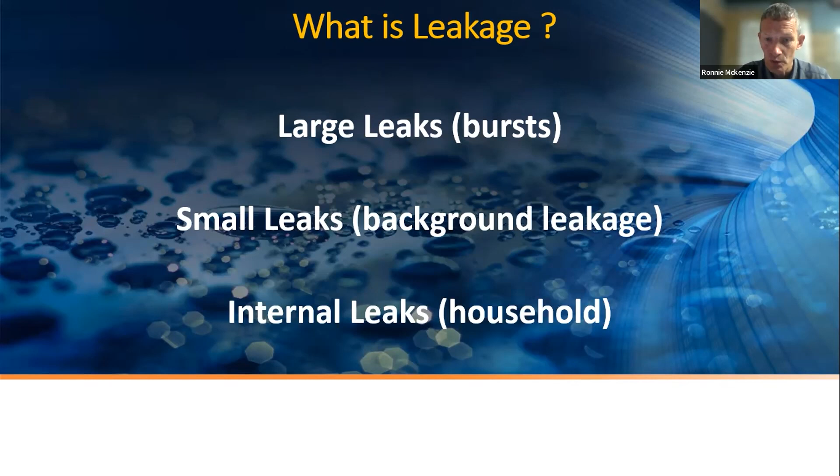Okay, so we've covered BABE. That was the UK water industry. They developed a whole bunch of different approaches to managing leakage. There's a little background leak there, just to show you a background leak. It's tiny. It's not worth looking for. You won't find it with leak detection equipment, but they are there in your system all the time. You cannot get rid of them.

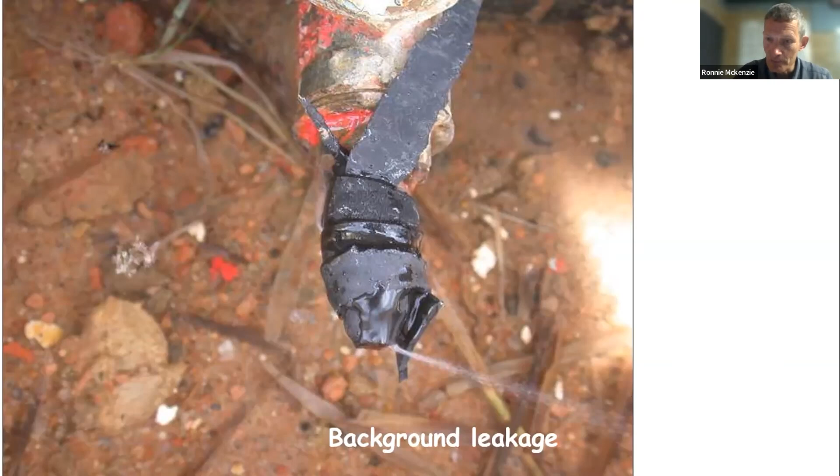The only way to reduce background leakage is either reduce the pressure or rip out your network and replace your network. And even then, you will always have some level of background leakage. You can't get rid of it at all. Burst leakage is normally quite obvious. Not always, but generally quite obvious.

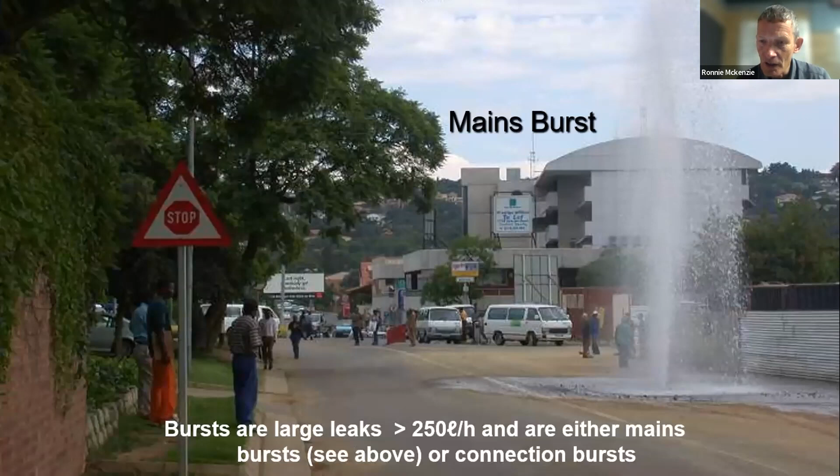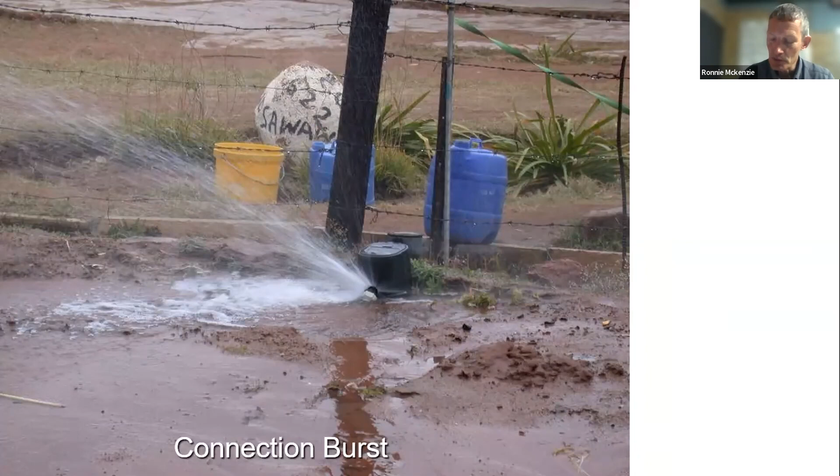This is a burst water main running at about 20 cubes an hour at about 50 meters of pressure. This is a connection burst. Again, most burst leaks are actually on the connection. That is the weakest part of the network. And most of the leaks do occur on the connection between the main and the water meter.

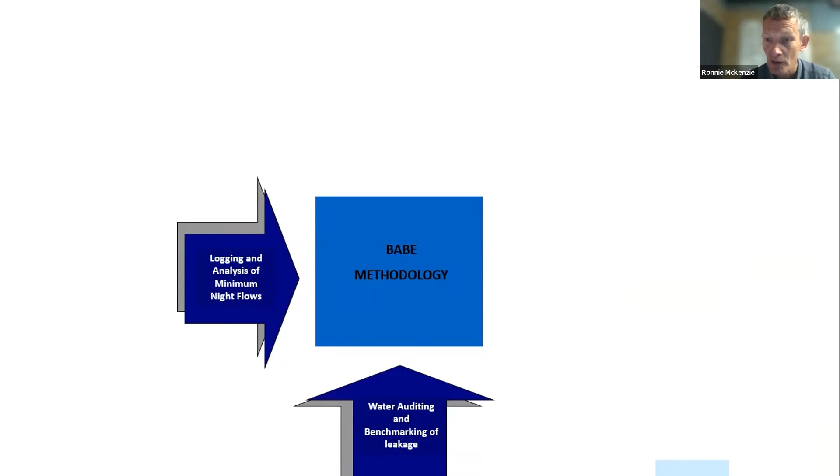Now, the UK water industry decided that if you're looking at physical leakage, then the BABE methodology is geared to help you manage physical leakage. And one of the things we look at is logging and the analysis of minimum night flows, which I'll come on to in a minute. Another item is the water auditing. We have a standard water balance, the IWA water balance, which is available off the internet, or many of us will be happy to help you with that if you need details on that.

Economics of active leakage control. That is how often you should send teams in to look for leaks in areas where you think you have a leakage problem, but you don't know where the leaks are because they're not visible. So you send a team in with leak detection equipment, looking for leaks, and the idea being that if they find them, you should fix them. We'll come on to this a little bit later, but the main message here is don't send people in to look for leaks if you're not already fixing the ones you know about. That is generally a rule of thumb.

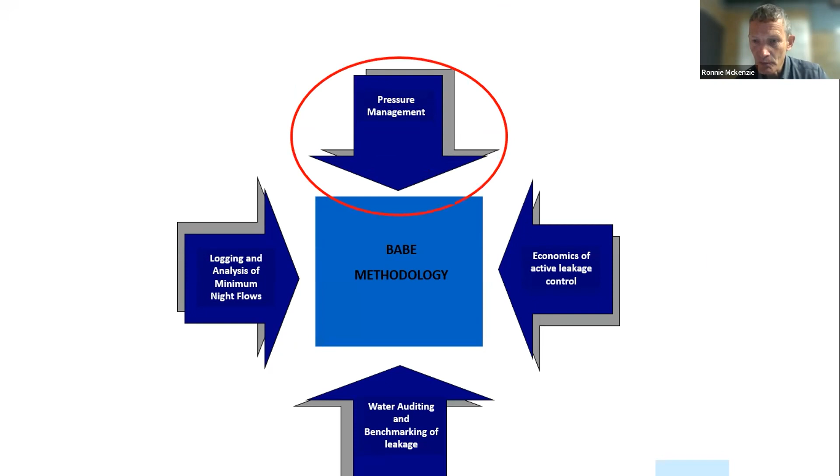Pressure management is one of the key elements of the BABE methodology, and we're going to talk about that this morning together with the logging. So we'll talk about pressure management to start with. Basically, pressure management in many cases is the low-hanging fruit. It is often an intervention that you can implement quickly and effectively, and it will make significant savings, big savings. It will often give you paybacks of less than a year and occasionally down to 3 or 4 weeks if you implement it properly in areas of high leakage.

The other message with pressure management is if the underlying problem in your system is high water pressure, then if you just fix the leaks and you don't deal with the high water pressure, then you're wasting your time and money, because the leaks that you fix will just pop somewhere else and the system will hit a balance at a certain pressure. So if you're going to implement leak detection, it's often a good idea to bring pressure management in at the same time. And as you fix the leaks, you gradually lower the system pressure at the same time.

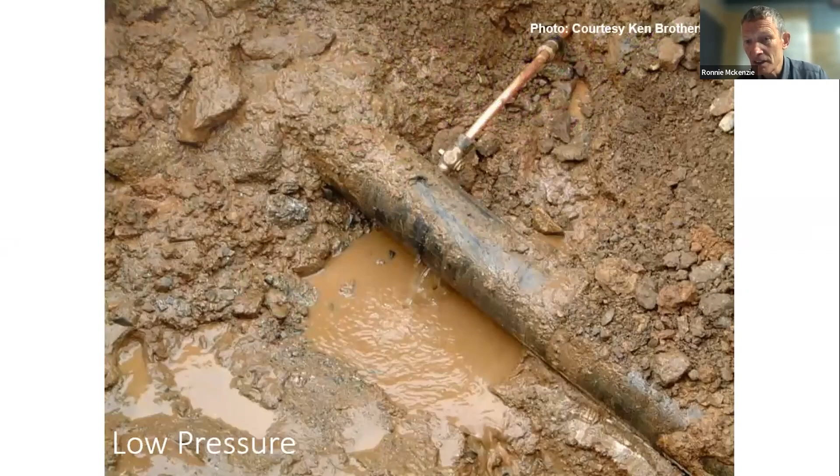Okay, this is just a picture of a leak at low pressure, and this is a picture of the same leak at high pressure. So pressure drives leakage. Most systems are designed to give a set minimum pressure at a critical point during periods of peak demand. So typically at peak demand, your pressure at the critical point somewhere in the system might be 20 meters. That is normally dictated by the fire department.

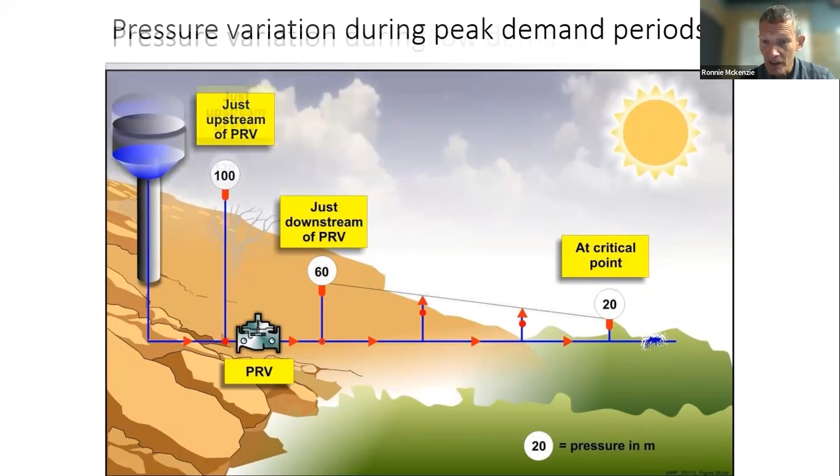They generally want a minimum pressure of around 20 meters in order to supply enough water in the event of a fire. Now at night time, that pressure builds up. So at night time, you've got high pressure in your system. And the idea behind a lot of pressure management is that during the daytime, the pressure's normally quite a bit lower than at night time.

And at night time, as the system starts replenishing and the reservoirs start filling up, the static pressure in your system increases. And that is why most of your burst pipes will occur during the nighttime period. As I say, at nighttime, the static pressure builds up. It also means that at nighttime, your leaks are running much faster than they run during the daytime. So if you can do something to reduce the pressure at nighttime, then you may make big savings.

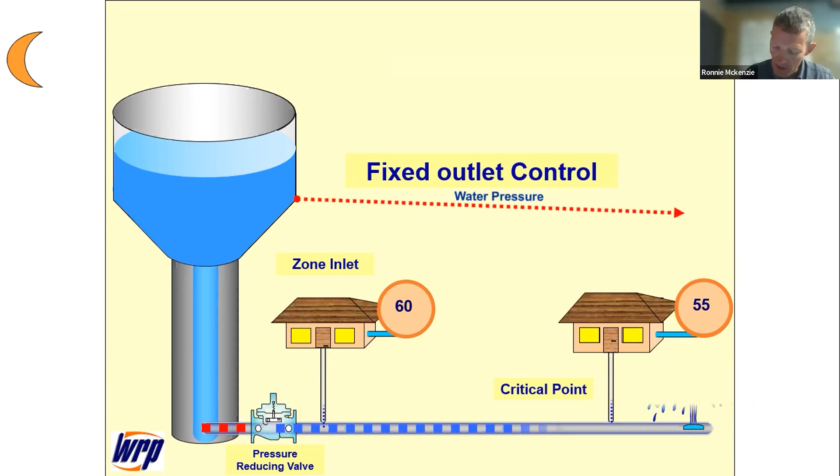It's not always the case. Sometimes you don't have pressure. Sometimes you're on intermittent supply, in which case it's a different problem. Here in South Africa, we've probably pioneered some of the largest advanced pressure control installations in the world. The biggest one that was built at the time was back in 2000 in a place called Khayelitsha.

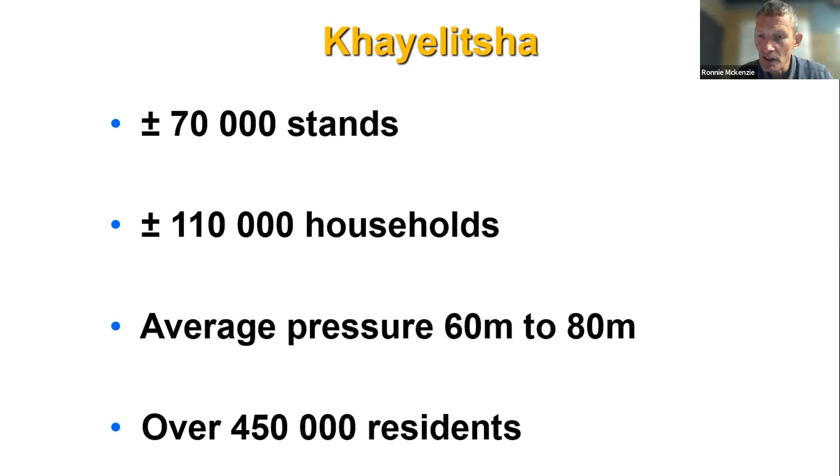Khayelitsha is a low to medium level housing area. It's got some very dense houses. It's got many houses that have waterborne sewage, etc. So it's got a variation of housing types. 70,000 stands, 110,000 households. Average operating pressure was 60 to 80 meters, and we supplied over 450,000 people from a single installation.

We put in advanced pressure control. Advanced pressure control is simply normal pressure control where we add an electronic controller, or a hydraulic controller for that matter, which will reduce the pressure at nighttime or during off-peak periods when you don't have a high demand. So you're lowering the pressure when the demand is low, and in that way you reduce the leakage.

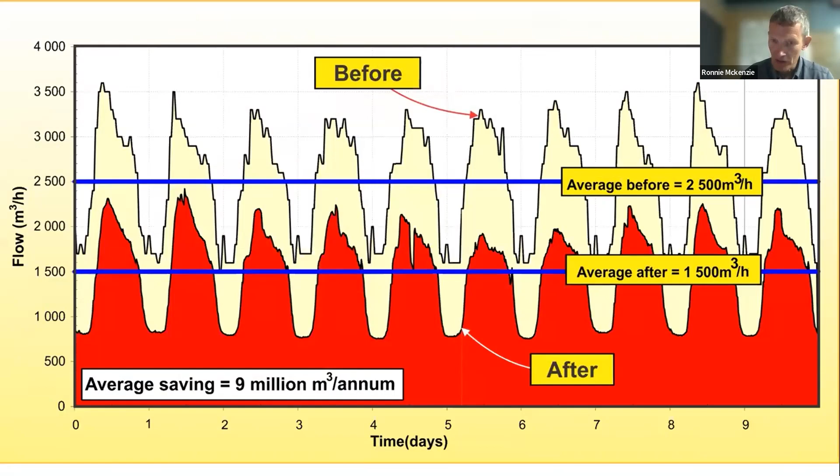And in this particular installation, we were saving 9 million cubic meters of water per annum, which is a fair chunk of water. Hourly savings were 1,000 cubic meters an hour. That's a megaliter an hour we saved on that installation. The payback was about 3 weeks.

The third big pressure management installation that we built in South Africa was built as a public-private partnership where the private party paid for the installation 100%. We built it, we ran it, we operated it for 5 years, and we received 15% of the savings each year for 5 years. So we received roughly about 75% of 1 year's savings.

In a public-private partnership like that, if it's a performance-based contract, you're typically looking at trying to get somewhere in the order of 1 year's savings. So if you do it over 2 years, you would want 50% per annum for 2 years. Or if you do it over 4 years, you'd want 25% per annum of 1 year's savings. It all depends on the level of leakage to start with.

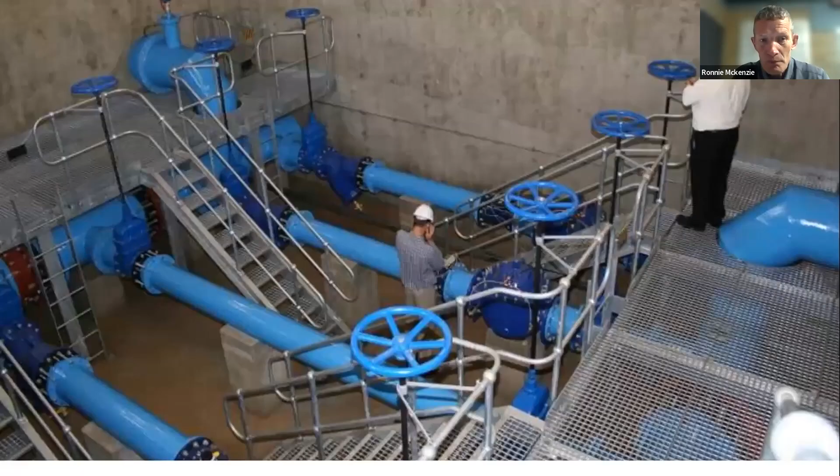This is the installation. It's a big one. It's still running. This was built in 2005. It's still operating. It also supplied 500,000 residents, high pressures. Interestingly enough, 80% of the water went back through the sewer network. So we were flooding the sewage treatment works, and still are, in fact.

I mean, the leakage is still very, very high, and the leakage was running into the sewers, and at night time the sewers were running with clean water, which is the worst thing that you can put into sewage treatment works, because the whole process of a sewage treatment works relies on getting a certain amount of goodies for the little bugs to eat and process and churn everything up.

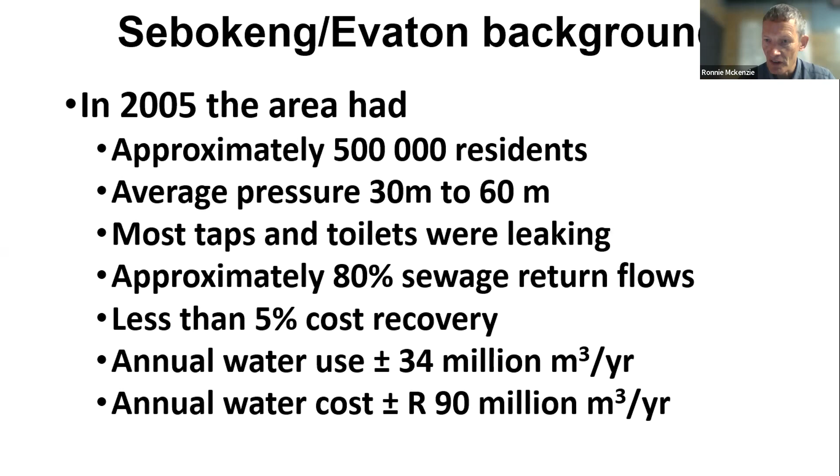If you flood them with clean water, then they just get washed out the system. And in the morning, when all the goodies arrive, there's nothing left to eat, to gobble them up. So it's a very important thing that you don't wash through a sewage treatment works with clean water. The savings, again, in that installation, we had a minimum night flow of 2,800, which was astronomical.

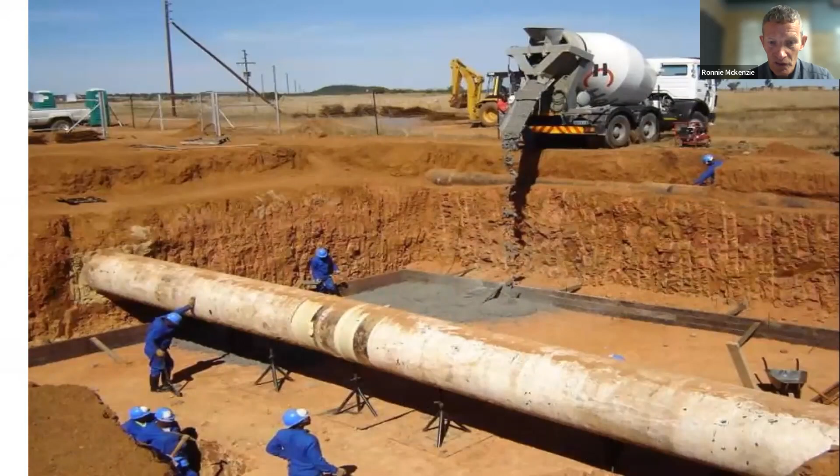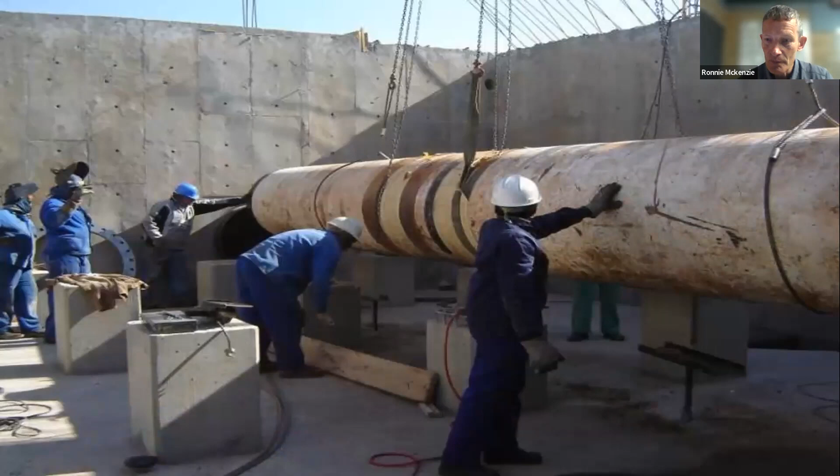We built this big installation. I'm going through it quite quickly just to let you see a few of the pictures. Everything was done by hand in order to create employment. That was part of the deal. So that big hole that you see there was dug by hand. This is us cutting into the pipe. This was us welding on the main flanges to the pipe.

You have to weld on the flange. You can't just weld straight onto a pipeline. It doesn't work because most pipes, if they've been in the ground for any length of time, are slightly oval. And if you try and weld a round pipe onto an oval pipe, you're in trouble. It just doesn't work. So you weld big flange plates on, and that's what we did there.

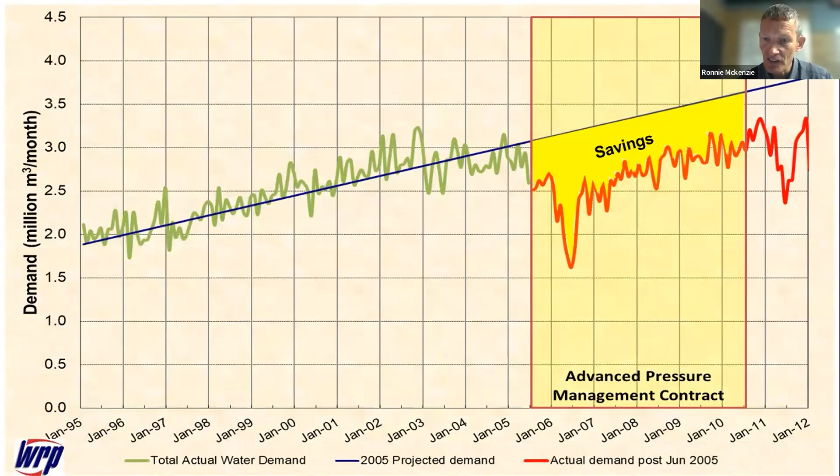This is us bringing the installation in. We brought it in, and the results, we managed to save about 50 million cubes of water. Again, very similar to the previous one. There's the savings, a picture of the savings. And when you put it into money terms, it was quite significant. It saved about $20 million over a 5-year period at the time.

Bear in mind, the water cost when this was built was 2 South African rand per cubic meter. The water is now 12 South African rand per cubic meter, which is almost $1 per cubic meter. So if we were to build this installation today, the cost of the water has gone up 6-fold, and the cost of building the installation has probably doubled. So we would be 3 times more effective if we were to do this installation today. So the payback would be best part of a week, maybe. So this is quite an interesting one.

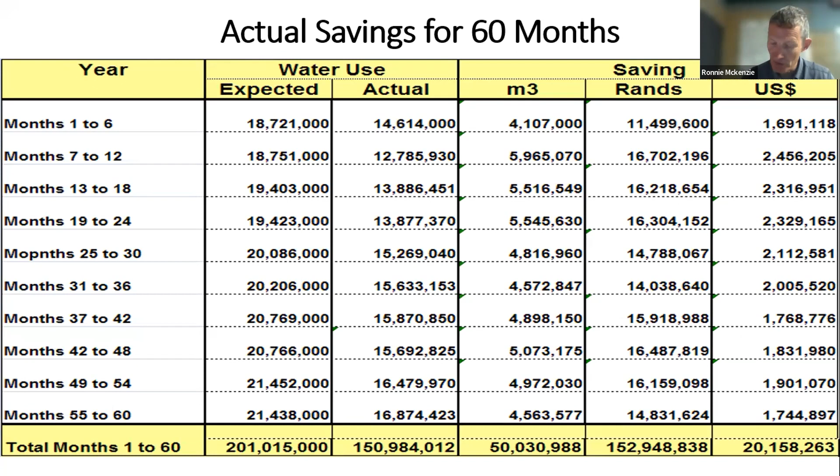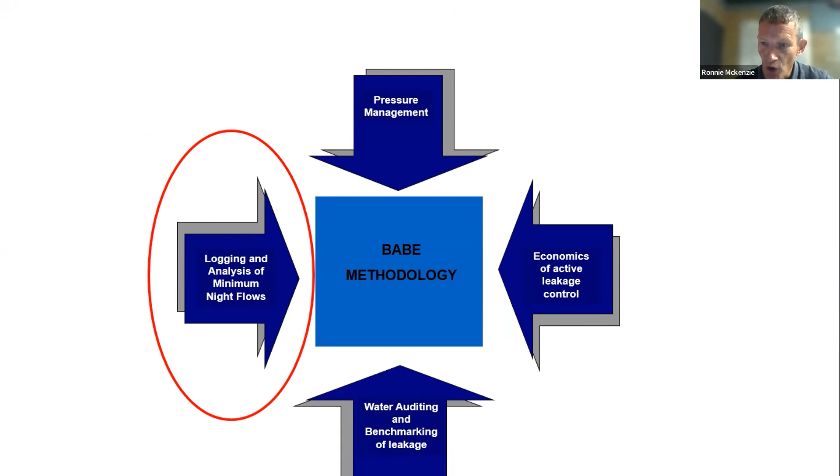Okay, back to the BABE methodology. I showed you this slide a minute ago. We're still on this one. I'm now going to look a little bit at logging. We're looking at the logging and minimum night flow analysis. Now, there's 4 BABE models.

And in the IWA, we have very many lady members. And when we organised our conference in Cape Town, I think our committee was 6 lady members and we only had 2 men. And it went really, really well, I have to say, because the men kept out of it and just let the ladies do everything. It sounds a bit chauvinistic, that, but they wouldn't let me do anything. I was actually told to butt out and just let them get on with it. So anyway, we had a good conference in Cape Town.

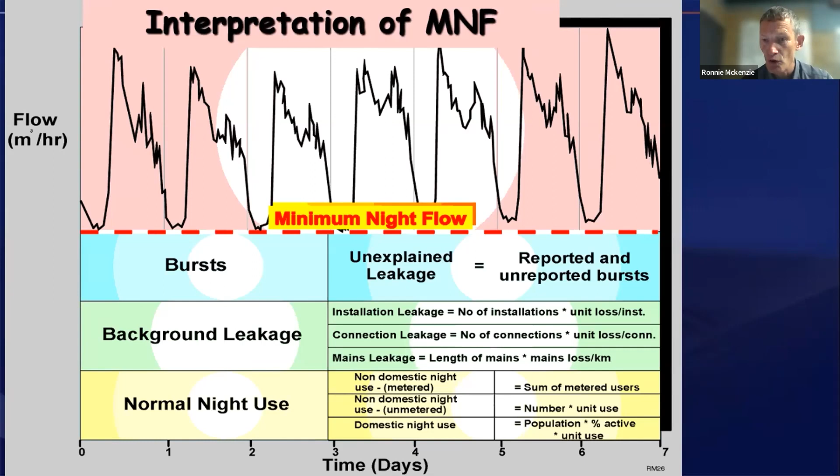Then you add the background leakage and the normal night use together, subtract it from your minimum night flow, and the difference is then your unexplained burst leakage, and that's what you're looking for. I'm not going to go into it in detail. The model's available. We can have a whole presentation just on this. So I'll go through it fairly quickly.

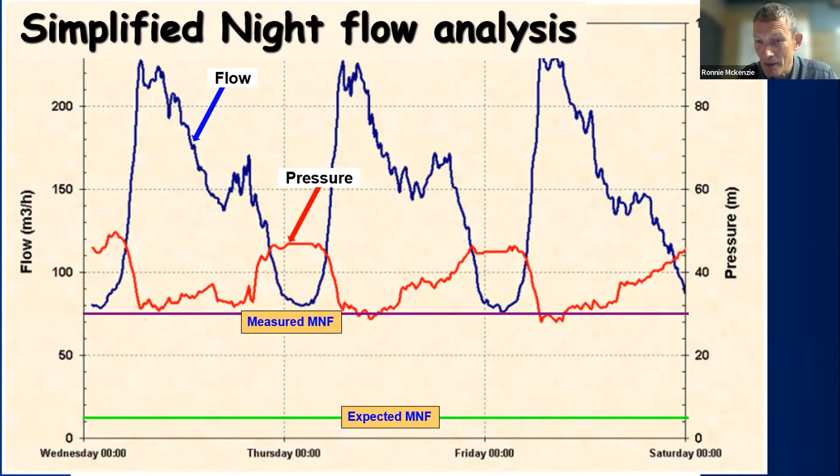This is a night flow analysis. This is showing you a 3-day logging result with the pressure. And you can see the pressure creeps up at night time as your minimum night flow drops. Here's your minimum night flow. You can calculate the expected minimum night flow using the BABE methodology or SANFLOW, or you can just do it on the back of a matchbox. It's not going to make a big difference, but that is what you do.

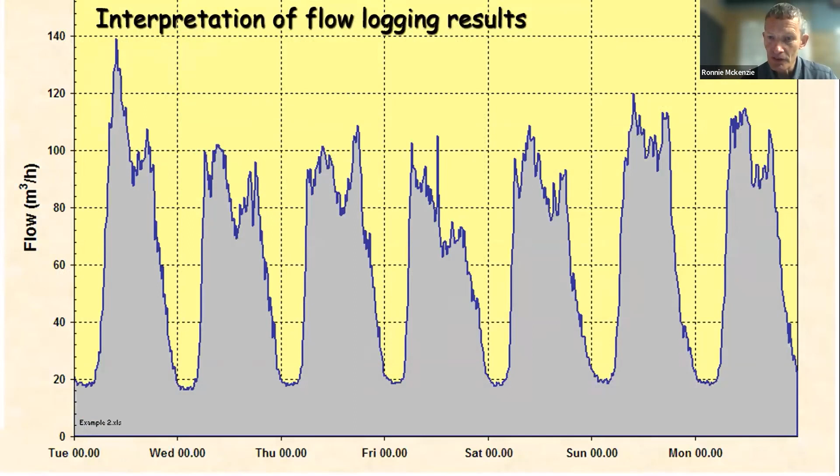And this is then your excess night flow. You want to know how much leakage is in an area so that you can go and look in that area. Now here's a logging result. This is a 7-day logging result. You can see that it's a domestic area, we've got a minimum night flow of 18, and we've got an average daily demand of 64. Now, you can use the BABE methodology to go to that 18 and see how much of that is expected and how much is excess.

A quicker way of doing it, and it's a new performance indicator that I'm recommending that the IWA adopt, and I'm sure they will adopt it. They're just a bit slow sometimes, but they'll get there. I call it the night flow ratio. You divide the minimum night flow by the average daily demand. So you divide 18 by 64 and you get a ratio, and that ratio gives you a good estimate of whether you have a leakage problem or not.

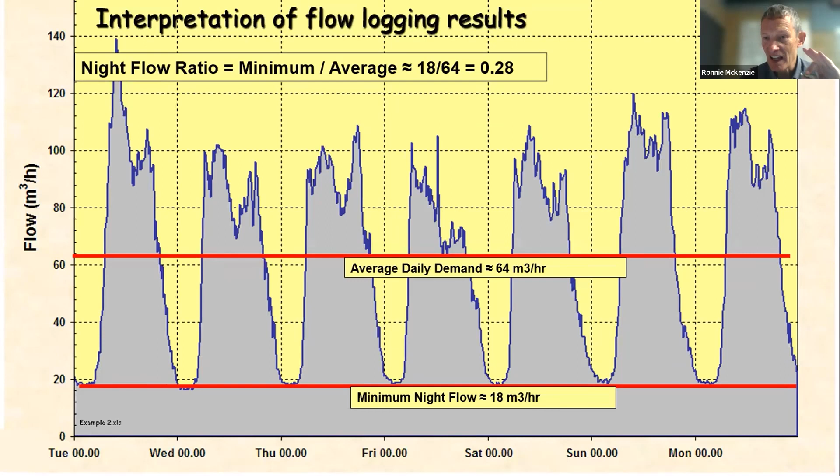In that case, 18 divided by 64 is going to be about 0.3, I would guess. 0.28. Okay, that wasn't a bad guess. I knew the answer anyway. A good number would be 0.1, and a borderline number would be 0.2. Anything above 0.2 is a bad number. That's high leakage. So even although this logging result looks quite good, it's got a 0.28 ratio, which means it's about 28%, most of which will be leakage. So it's a very quick and easy estimate that you can use to calculate whether you've got a leakage problem.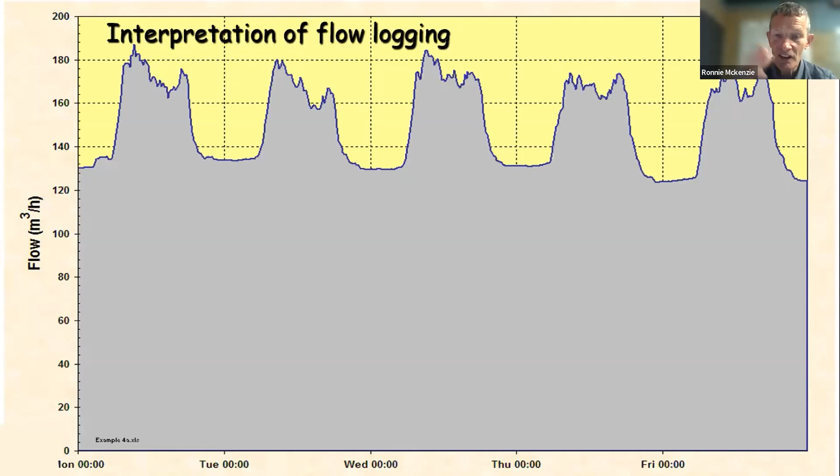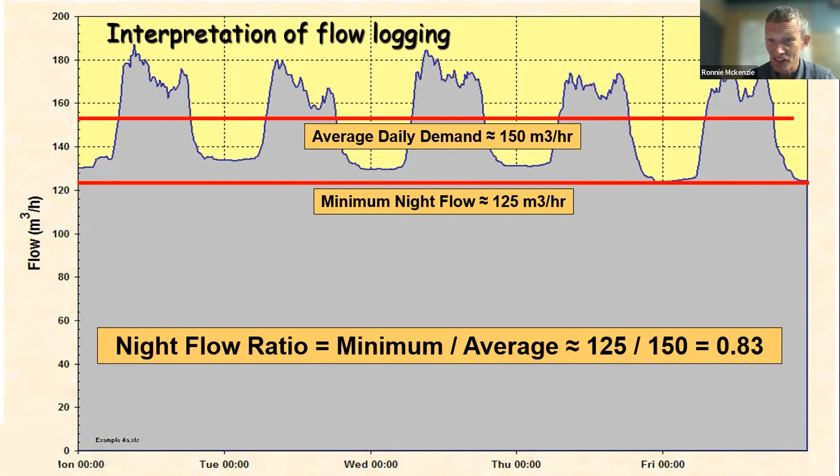These are real examples from real areas that we work in. This is another example to show you what we do. Minimum night flow is 125. The average daily demand is 150. Your night flow ratio, hang on, I need to move this little window, is 0.83. That means you've got astronomically high leakage. That is really high. This is terribly high.

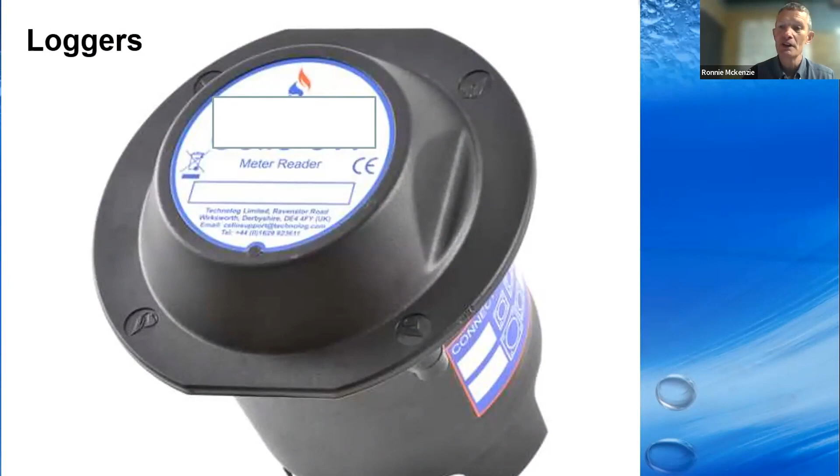Now, to get those logging results, you need a logger. There's many different types of loggers. We use some that we import from England, but there's South African loggers, there's loggers from Europe, America, Japan, China. I would recommend you get a good one. There's no point putting in a cheap logger when most of the effort is actually getting to the zone and then you put it in.

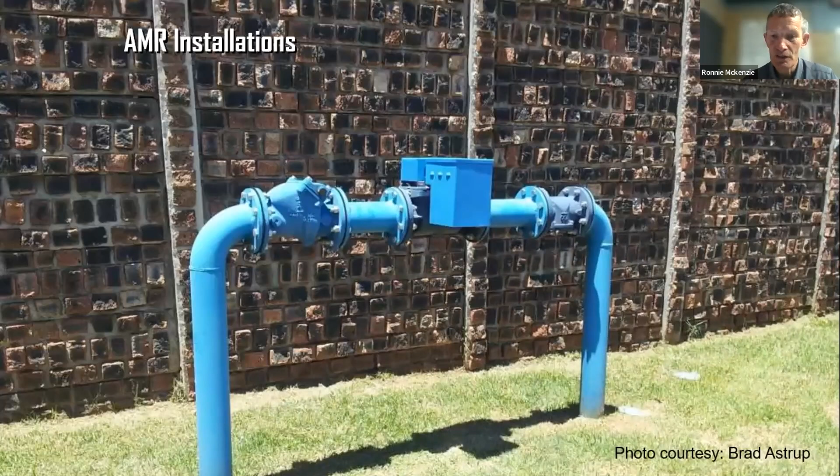You connect the logger to a water meter. Again, we've got to protect the logger. We work in areas where anything that moves will move. So we often have to lock it up in a steel box to protect it. There's one of our installations there. It's not terribly attractive. The box is functional. You need a crowbar to take it off, and most people don't bother too much.

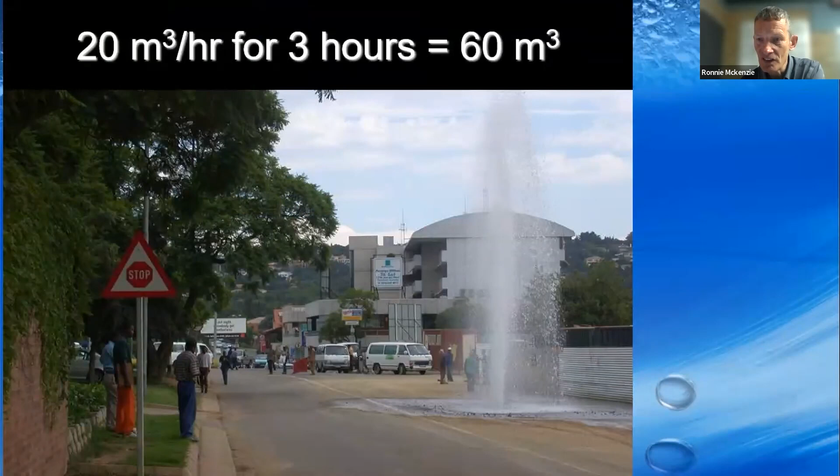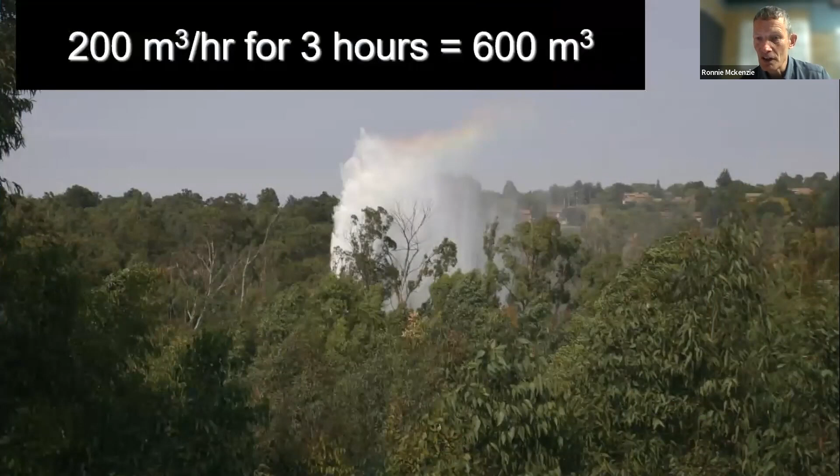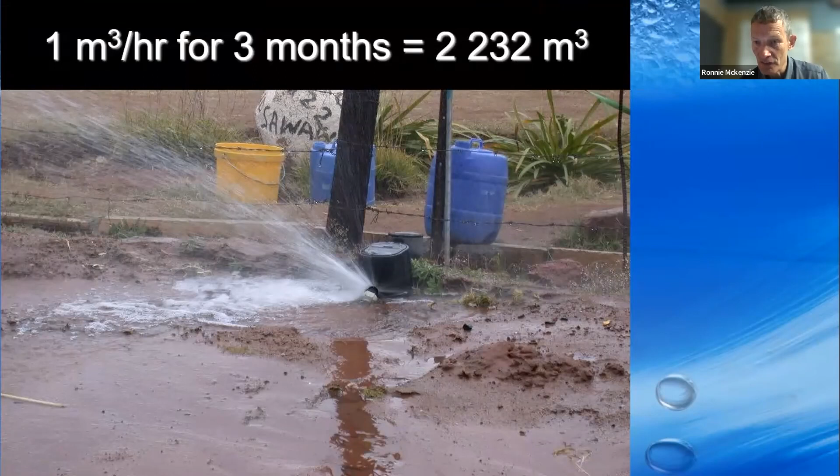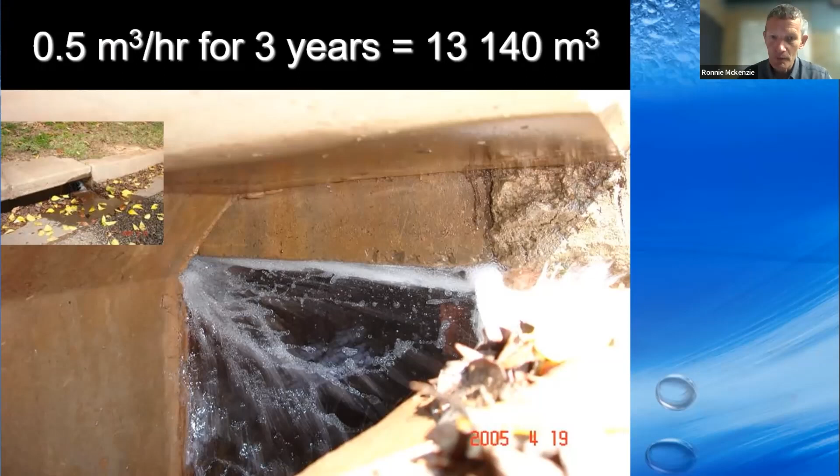So it's not the size that counts for a leak. It's very important that it's the running time. It's how long it is running. That is the key element. So don't ignore the small leaks. If you know of a leak, don't let it run for a year, because you'll end up losing enormous amounts of water.

Now, there's a lot of new technology on leak detection. You've heard of the satellite. There's satellites now that apparently can look down and spot a leak from outer space. Elon Musk has put up about 400 satellites, and there's all sorts of companies offering you a service. You can sit in your office and do nothing, and it will find the leaks for you and tell you where they are. Supposedly. Our success rate with satellite leakage: our clients that have used it have been less than impressed, I would say.

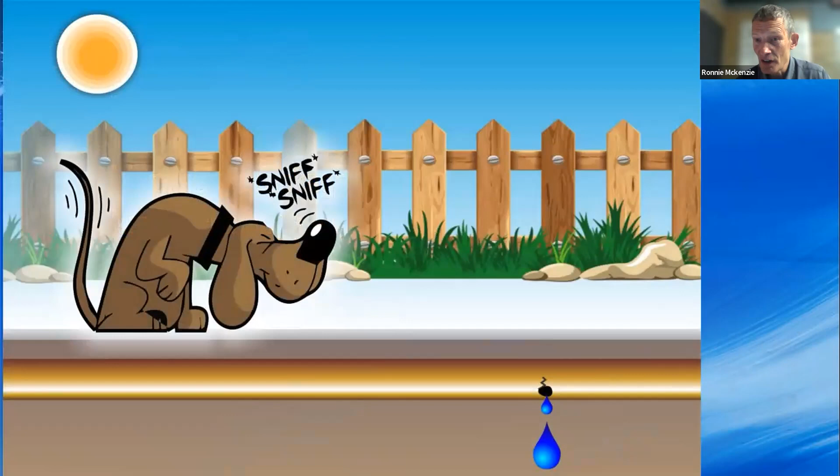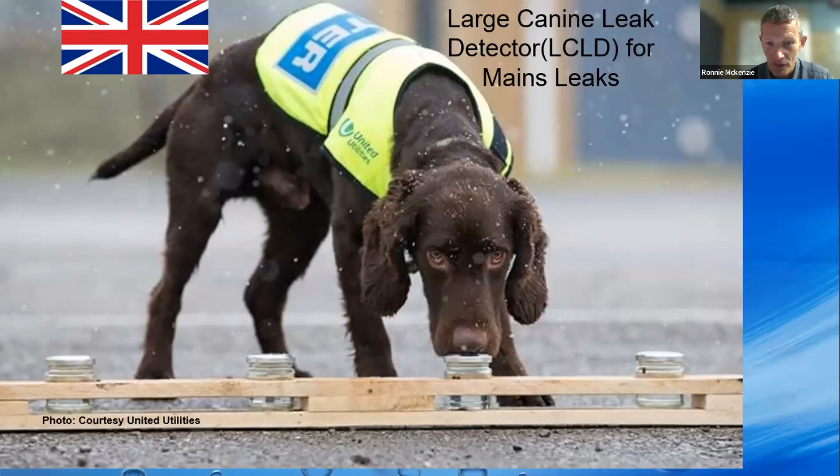There's new technology. There's dogs now that can go and sniff leaks out. There's a dog, it's an English something or other. I call it a large canine leak detector. We like acronyms, so it's an LCLD for short. They can apparently sniff out the chlorine in the water. The trouble is, after a few days, the chlorine's gone anyway, and you won't be able to sniff it out. So I'm not sure if it works. We tried it in South Africa. It didn't work. We used a big Ridgeback and a little sort of Italian greyhound. We thought we'd found a leak at one point, but it was a false one. It was a bone, I think. It didn't work.

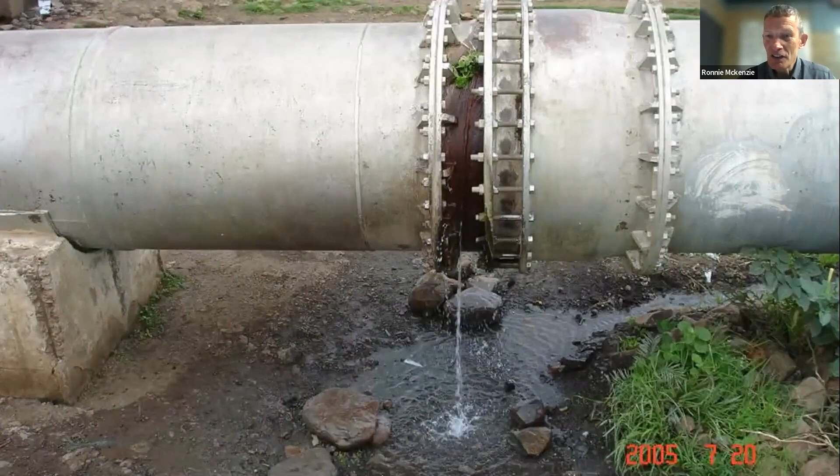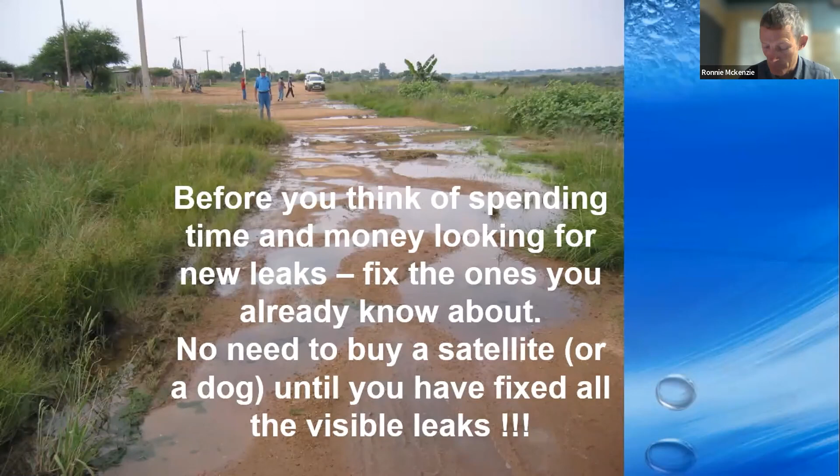Again, looking for leaks, don't waste time if they're obvious. Fix the obvious first. That's the cheapest water you'll get. So if you've got this type of thing and you've got leakage, before you spend money on a satellite or a dog... a dog's actually maybe worthwhile because they're very loyal and they can be friends. At least if you buy a dog, you get something for your money. On the satellite, I would wait until you've fixed all your leaks before you buy or hire a satellite. Fix the ones you know about. That's my word of advice to you.

I would say that logging, continuous monitoring, is becoming very cost effective. You can monitor all sorts of things: water quality, chlorine, pressure, flow, level within a reservoir, level within a borehole, all sorts of stuff. It's now becoming very cost effective to monitor it continually. And that information is very, very valuable.

We've got our own web-based system with about 10,000 loggers reporting every morning. You can use any sort of logger. We use GPRS loggers, we use Sigfox loggers, we use radio frequency loggers, we use LoRa, long range or something like that. I've lost track of all the acronyms, but basically they all grab the information and send it into the cloud.

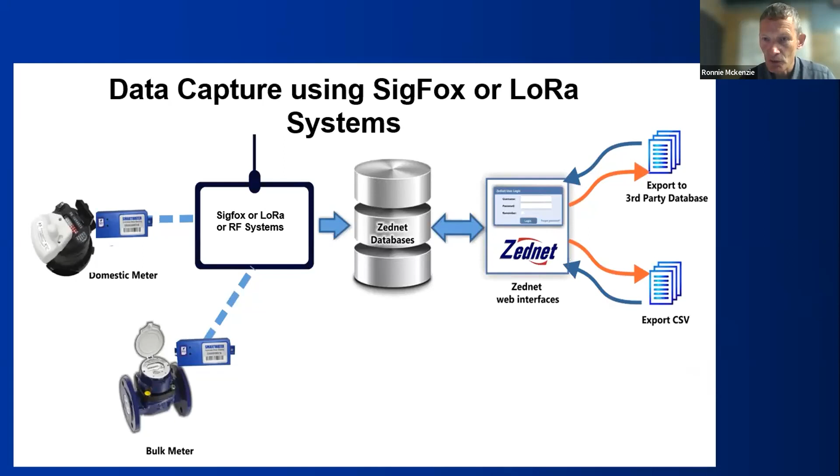We grab it in the cloud and then we display it in a database that helps you analyze what's going on. So we run our own system. There's lots of systems available. Every country will have someone with their own system. So we like ours. We think ours is the best in the world, but so does everyone else. They all think theirs is the best.

We go and play golf and talk business with our friends. I don't play golf actually, so I do other things. I'm like Peter, we do cycling on our own and don't talk to anyone over the weekend. So we're kind of cycling hermits.

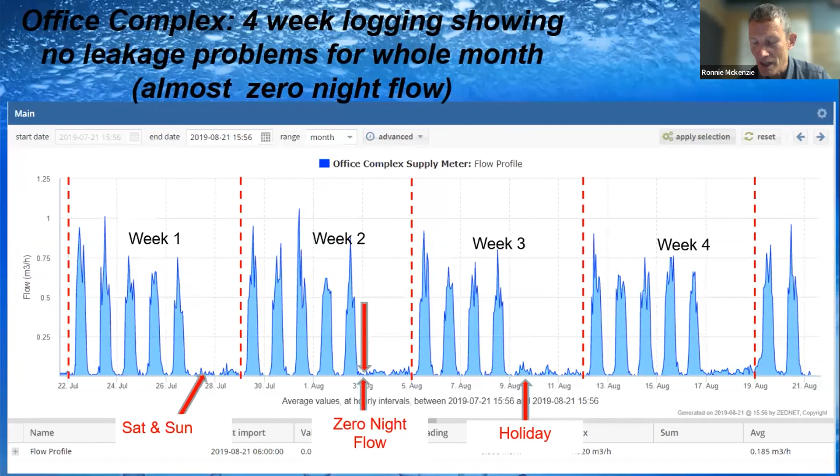Anyway, you can see the weekends have got no demand there. And you can also see on week 3, there's only 4 peaks. Why is that? Why don't we have a 5th peak? It was a holiday, that's why. We don't work on holidays either. So you can see this is what you're looking for on a nice logging result for an office. There's a Saturday and Sunday, there's your holiday, and you've got the key thing on leakage. Look at the night flow. You've got a minimum night flow of almost 0 here.

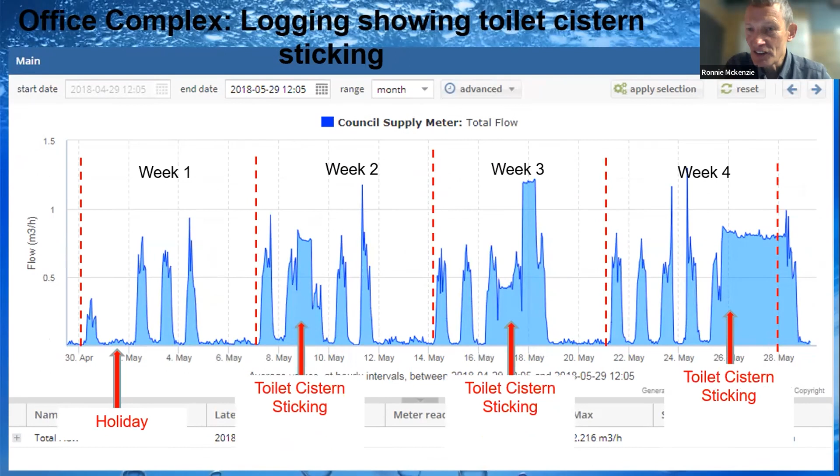This is another month, another 4 weeks. What happened here? Doesn't look quite the same. It's not as nice. Things are happening here. What's happening? Interestingly, you look at the minimum night flow. There's a holiday by the way, and we've got a toilet cistern leaking. We decided that in order to save water, we would put in dual flush toilets. We thought that's a good idea. Everyone in America does that, in Australia, and they save lots of water. We'll do the same here in Pretoria.

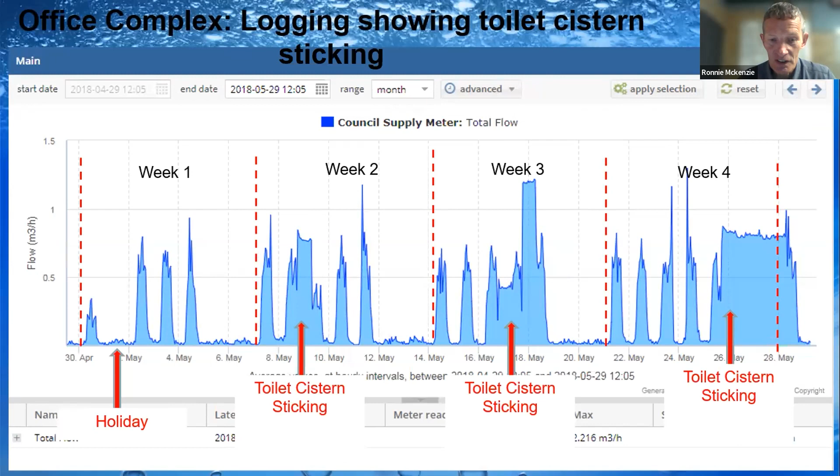Didn't work. Our water's got silt in it, or dirt or something in it, and it blocks up the valve and the toilet cistern starts sticking. So after spending money on expensive European dual flush toilets, we eventually had to take them out because we were wasting more water than ever. So the dual flush toilet thing didn't work for us. I'm not saying it won't work for you. You might be in a place where the water quality doesn't have any dirt or silt in it.

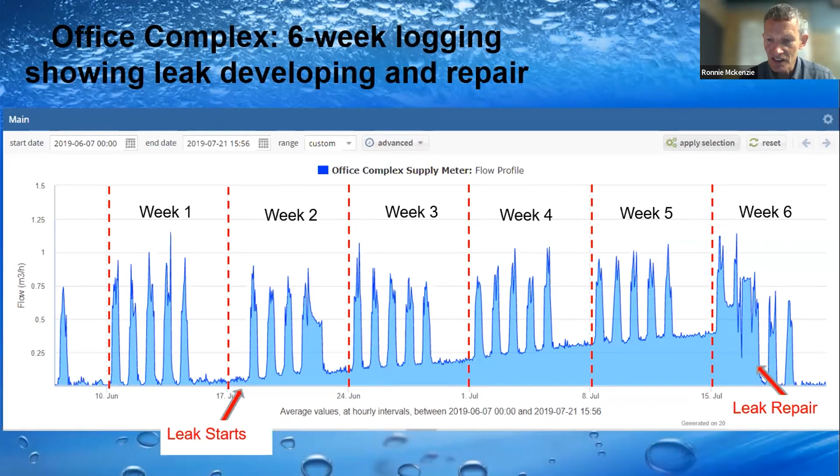After 6 weeks, I couldn't put up with the phone calls any longer. And I went out and I found it and I fixed it. The body corporate were still messing about, trying to get 3 quotes from plumbers and then get all the owners to agree to do something about it. So we went and fixed it ourselves. That's the leak starting. That's the leak repair. That's the volume of leakage that we lost. And that was our toilet cistern still leaking. We still had it at that point. We've got rid of it now. We took them out and replaced it with a normal standard toilet.

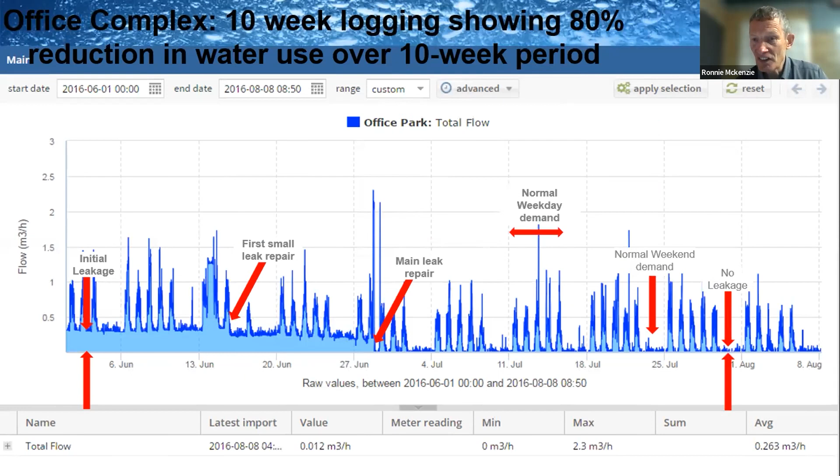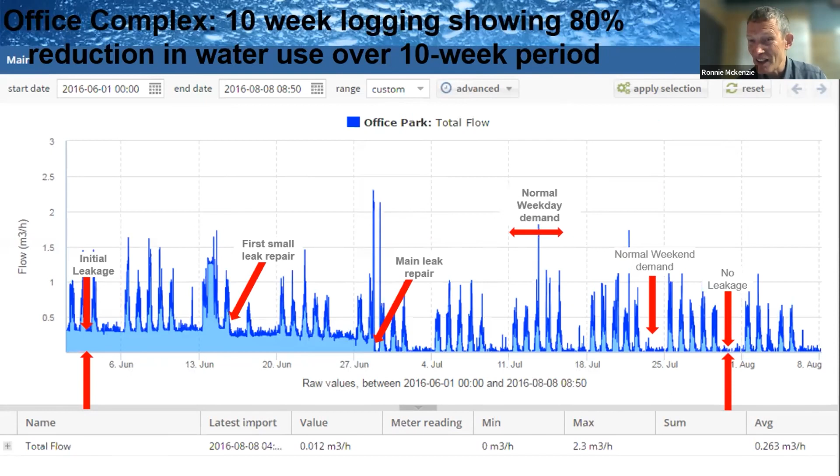And eventually, we managed to get it down to virtually zero in a complex. And what's interesting, the water use in our office complex is now 20% of what it was previously. And it had been at that level for 20 years. Nobody knew what it should be. So office complexes often, you might find there's savings to be made.

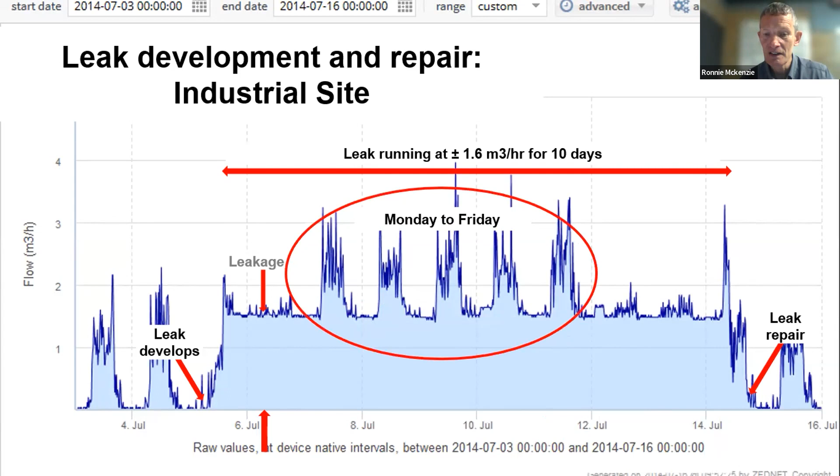This is another one. This is an industry, just a single factory. The reason you can see that is it's got a 5-day demand, and then the weekend demand is quite low. If it was a townhouse complex, you wouldn't have that low demand at the weekend. So the logging results are quite interesting. Leak develops, there's your leakage, that's it repaired, and it ran for about 10 days. It wasn't a big leak, it's like a tap running fully open for 10 days. There's your Monday to Friday, and there's your Saturday and Sunday.

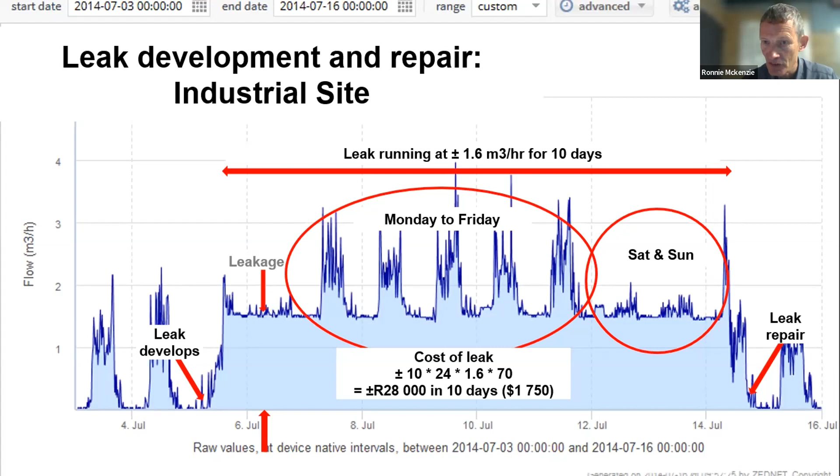The cost of the leak, that 10-day leak, was just under $2,000. Without the logging result, it would probably have run for 6 months before someone figured out that they were getting a high water bill. Because a lot of the time, the councils don't read your water bill monthly. Some of them use estimated readings and then check every 6 months to see if everything's fine. So be careful about that.

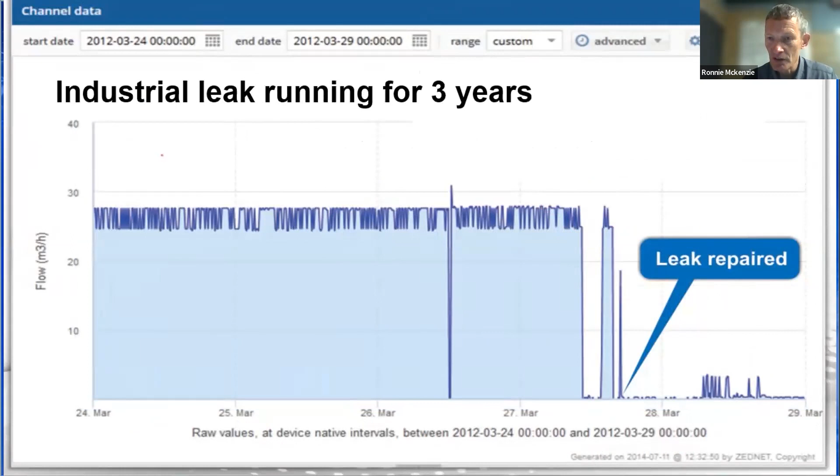This is another logging result. This had been running at 25 cubes an hour for about 3 years. And we put a logger on and we found out that the meter was turning continually. And it was just a pipe that had been burst since when they put it in. And the owner of the industry was getting the same water bill every month, and they just thought it was normal.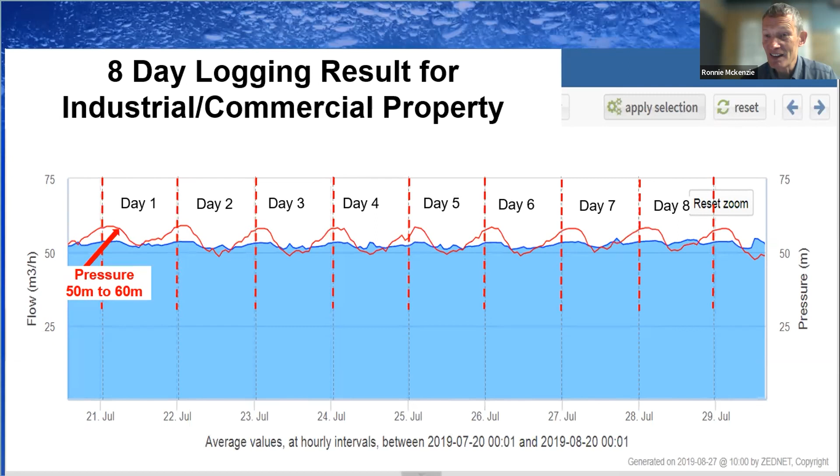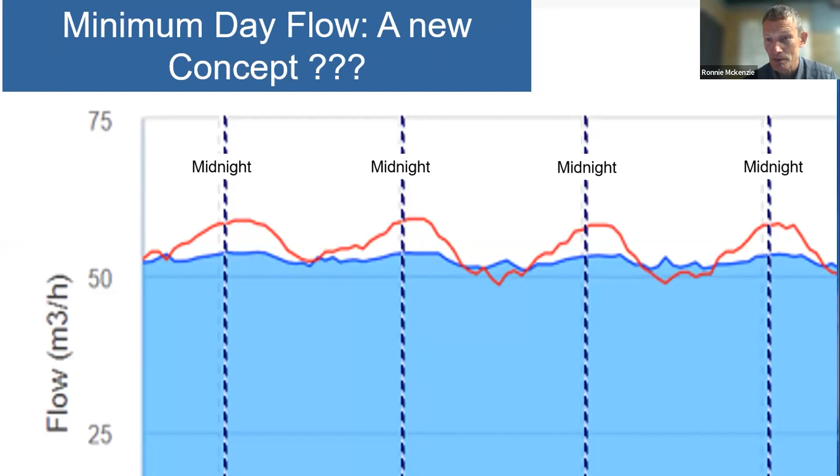So there you go, there's consumption. And it had a minimum day flow, not a minimum night flow. So it was totally bizarre. The only thing constraining the leakage was the size of the supply pipe. If we put in a bigger supply pipe, we could have doubled the leakage quite easily. So that was an interesting one.

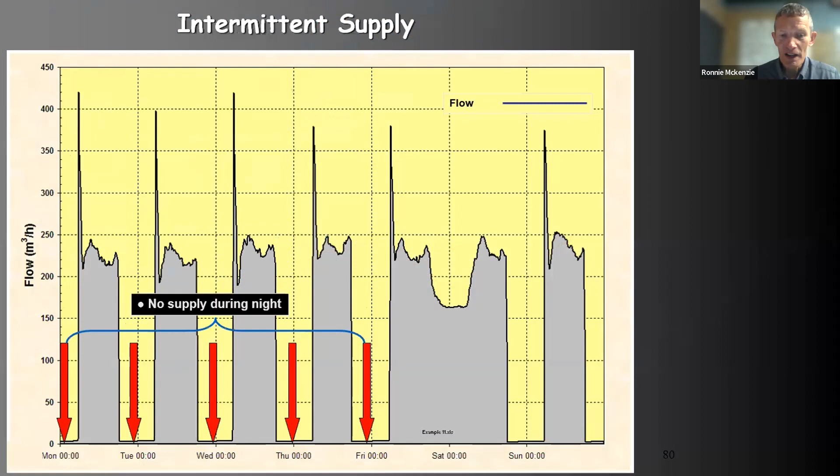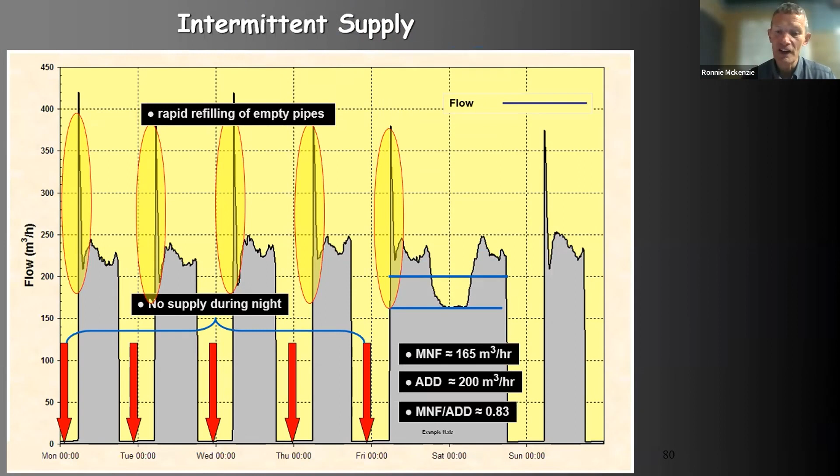Here's another one, intermittent supply. Very bad. You don't want to have intermittent supply. This is an example, and you can see the leakage here was astronomical. And in areas of intermittent supply, you normally find that the leakage becomes very, very high.

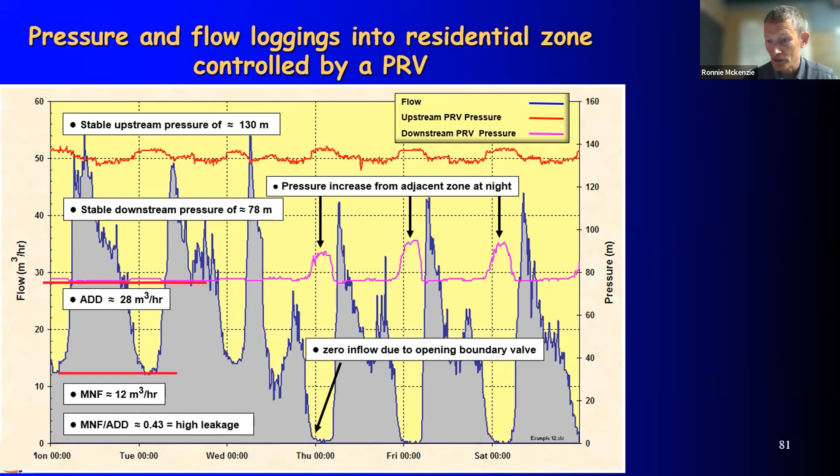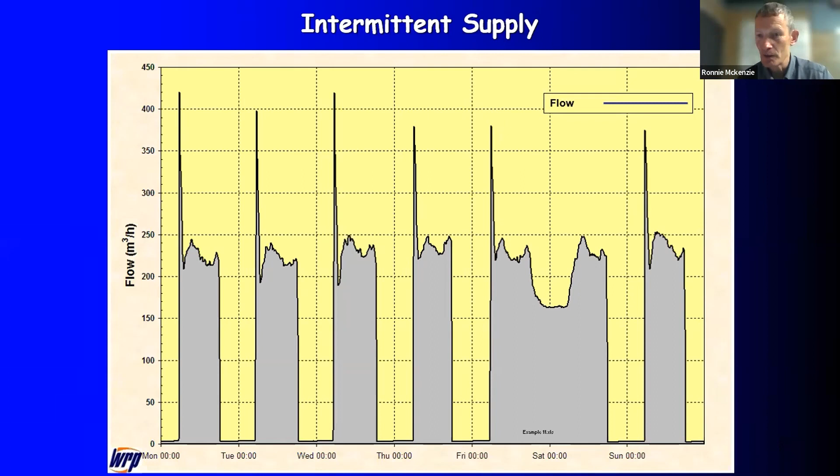Now, something else, intermittent supply. I just showed you this graph. Very bad. You do not want to go on to intermittent supply if you can avoid it. When Cape Town had its day 0, they managed to reduce their demand by over 50% without resorting to intermittent supply. Intermittent supply causes your network to, you get air in the system, you get bugs, you get sucked sewage into the system, you'll get cholera, typhoid, all sorts of terrible things with intermittent supply. Do not go there if you can avoid it. It should be the measure of last resort.

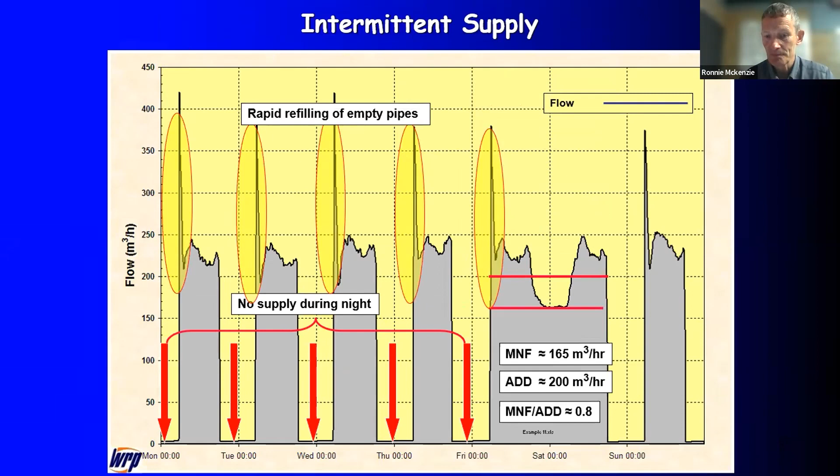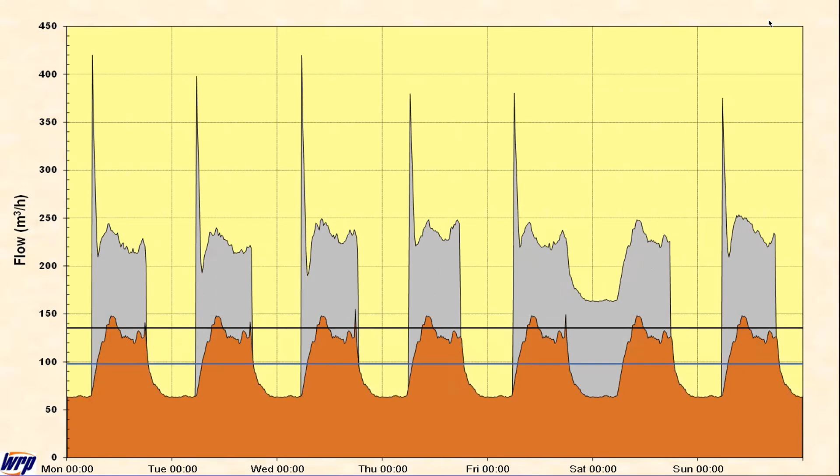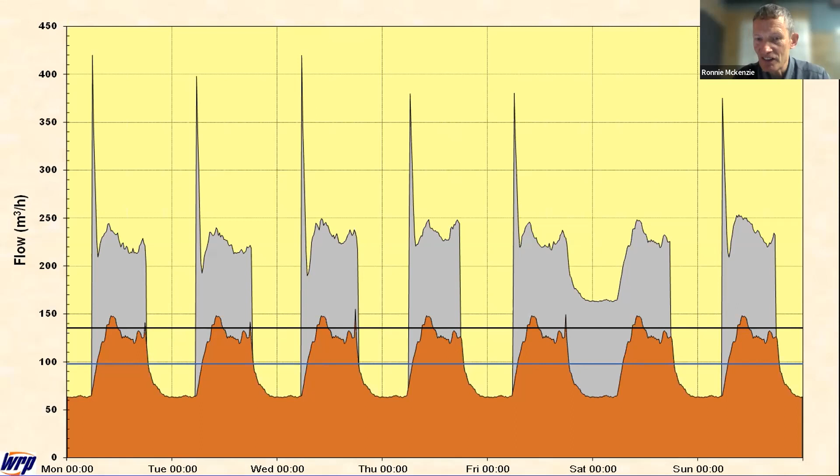Okay, what you want to do, and you can do it, you can move on to a continuous supply at a lower pressure. If you lower the pressure, you may be able to supply the area with full supply, but at a lower pressure, and you can end up dropping the average daily demand. So by giving a continuous supply at a low pressure, you may end up supplying less water than an intermittent supply at high pressure. And we can talk about this for an hour on its own. Anyway,

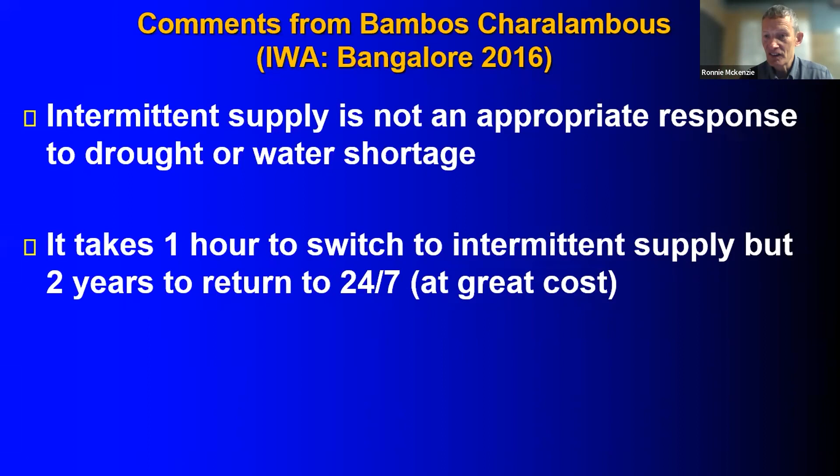try not to go on to intermittent supply. I know it's not always possible. Often you end up in a crisis situation that you can't do anything else. But if you can try and see the crisis coming and start reducing the consumption, try and avoid intermittent supply at all costs. It's a downward spiral. It is not something you want to move on to. So intermittent supply is the measure of last resort.

Try and reduce pressure rather than intermittent supply. Take action early as you move into a drought. Implement restrictions. Reduce pressure. Do whatever you can. Do not cut people off if you can avoid it. So take action early, reduce wastage, and try not to go on to intermittent supply.

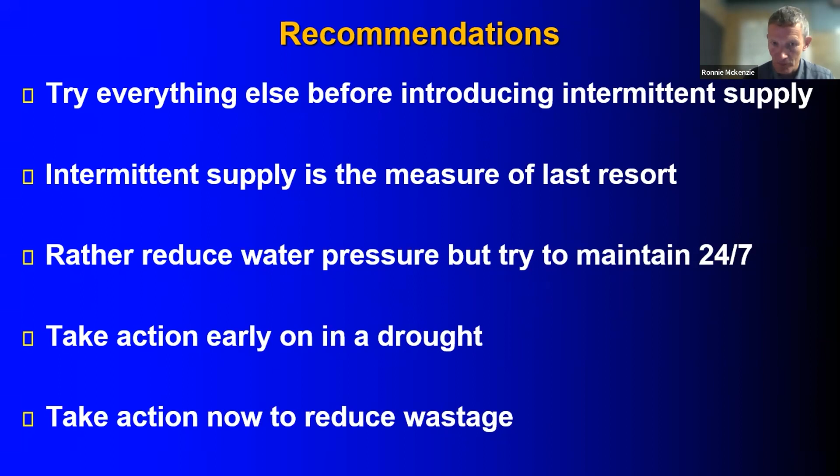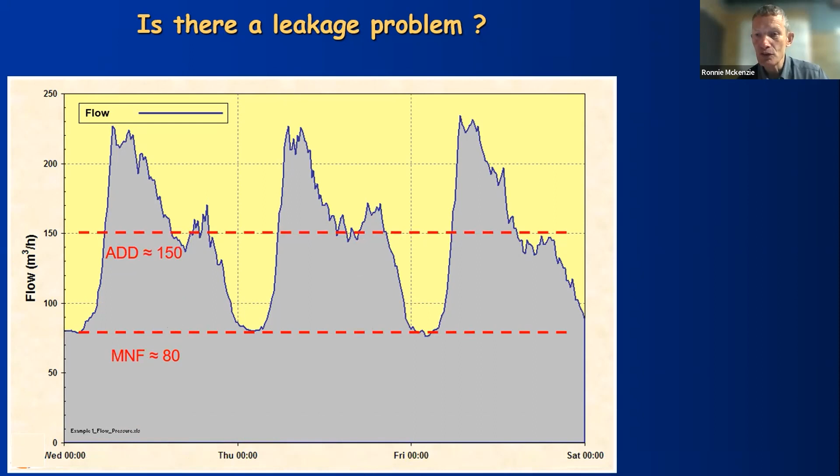Okay, it's the slide we started with. Do we have a leakage problem? Well, if you look at that result, the minimum night flow is 80. The average daily demand is 150. If you divide 80 by 150, you get 0.53, which is our night flow ratio. And I indicated anything above 0.2 is a problem. So 0.53 is certainly a problem. So we do have a leakage problem. So all of those that wrote yes on the paper at the beginning, then you can take a bow. Those that wrote no, sorry, you were wrong.

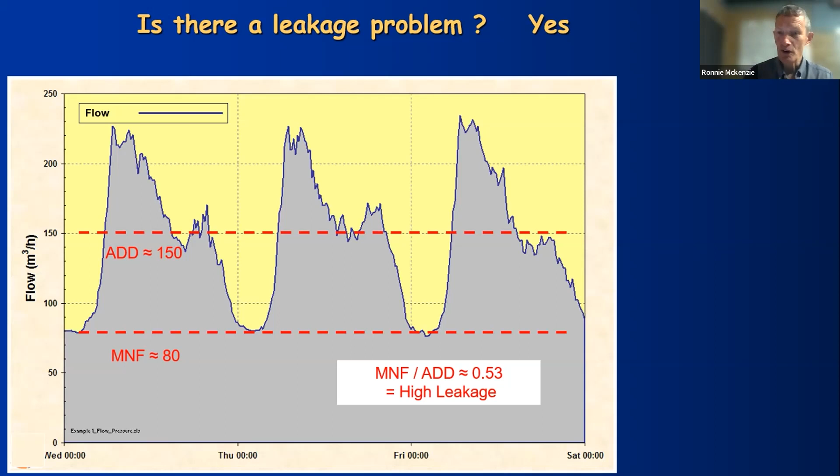Thanks a lot. Okay, that's me finished. Questions, Peter? Ronnie, thanks so much for that presentation. You are going to get a lot of questions here. You're going to get a lot from GWCL. This is a hot topic for them right now. I don't think they've seen one of your presentations before. Others have. Ronnie, I want to kick this off with a question for you.

Yesterday, we had presentations by our utility partners, and we saw non-revenue water, in some cases, from 50% nearing 70%. Obviously, that's about the worst that we see. The question I have for you, Ronnie, is put yourself in the position of a utility manager. Maybe you're a utility manager in Zimbabwe. That's your new job. And you've got limited human resources, and you've got extremely limited cash resources, okay? And your non-revenue water is over 50%. So remember, your human capacity is limited and your cash capacity is limited.

If I ask you to bring your non-revenue water down from 50% to say 40% in a year, can you tell me what you would do? Because what you would do as a utility manager, I'm sure those on this call will think about to say, hey, yeah, I can do that as well. So Ronnie, with those constraints, what would you do?